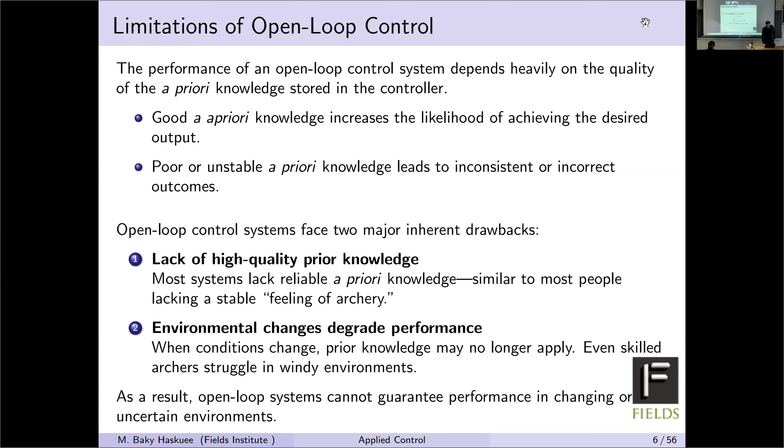We showed the utilities of the closed control system. The first utility was in terms of uncertainty. We showed that open loop control systems are not efficient, so we need to actually have the closed control system.

Because reality has uncertainties, the first utility of feedback control is to show its preference over the open loop control system.

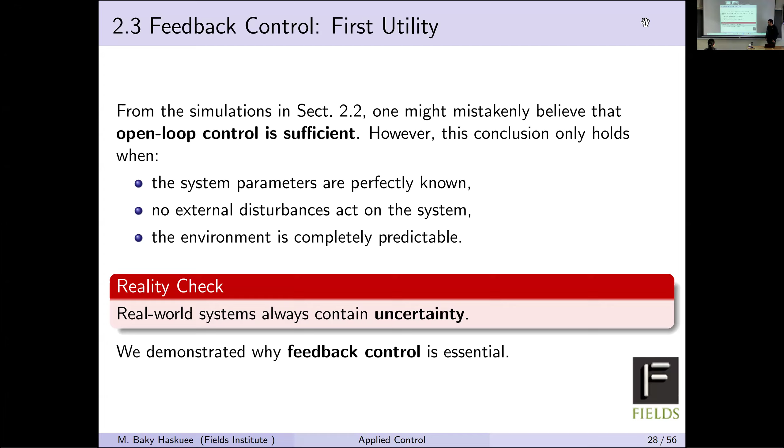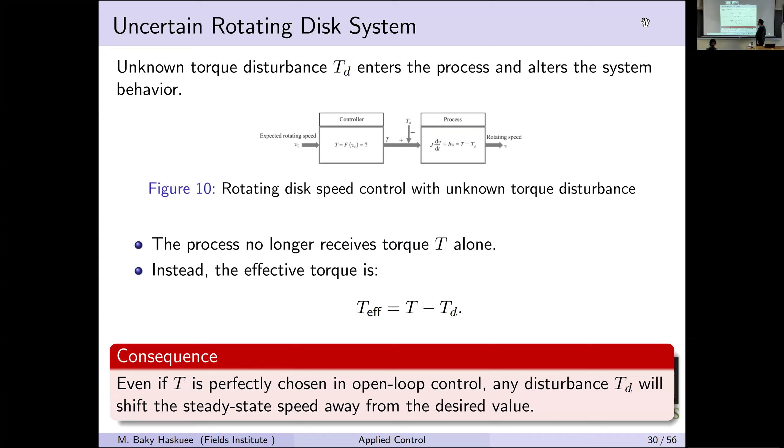We discussed that when we have, for example, external disturbances to the system, here you see that TD is the disturbance to the system. Then we compared, if we have such a disturbance, whether open loop control or closed loop is much better, and we compared the results by simulation.

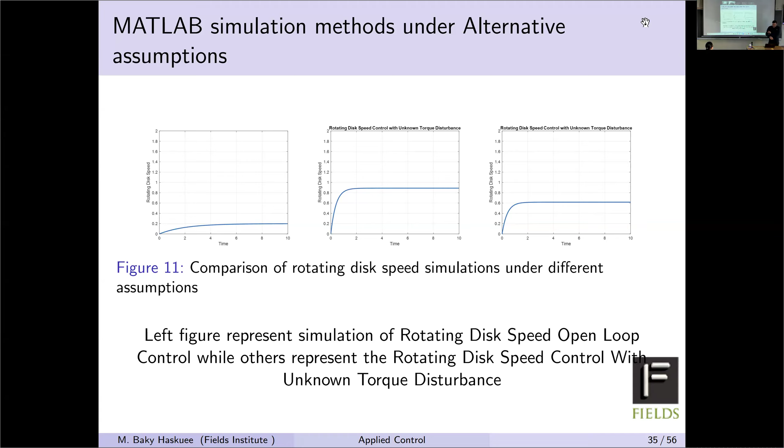So we define two types of control feedback. One was an extreme feedback. The extreme feedback says that if the actual speed of the disk is different from the expected speed, then there is an error.

So the control system will set the torque to the maximum when E is greater than 0, and when E is less than 0, it will set it to minus T max. So these are the two extreme cases.

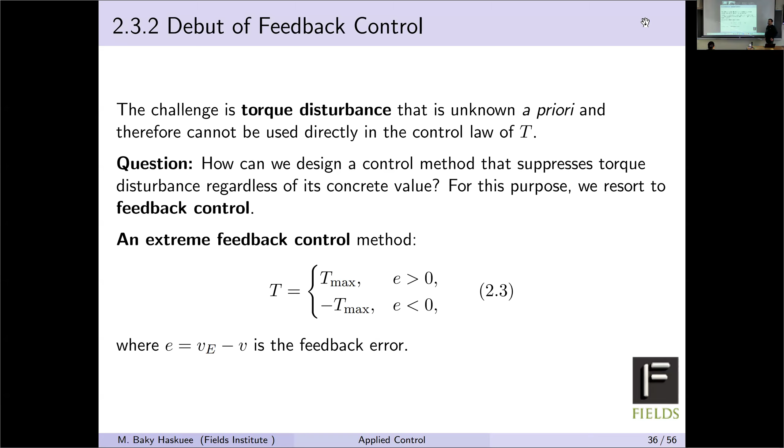In this case, we will see what will happen if we have such a feedback in the control. First of all, we measure the speed by the sensor, and in this system there is no estimator because this is a simplified system, so we just have the sensor. The sensor verifies that the actual speed equals the feedback speed and sends it to the controller.

Because there is a deviation, it means the expected speed is not equal to the actual, or rather the actual is not equal to the expected, which is a better way to say it. Then the controller receives the signals and sends the signals to the actuator.

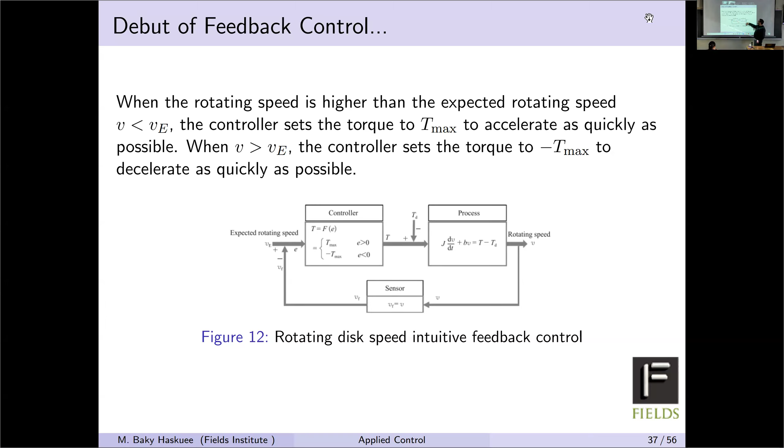So in both cases that we mentioned, if E is greater than 0, it will send the signal and set the torque to T max, and if E is less than 0, it will be set to minus T max. Then it will be sent to the torque, and the process will receive that, and it will be continued.

It means that in the presence of uncertainty, the feedback control actually performs much better than the open loop control system.

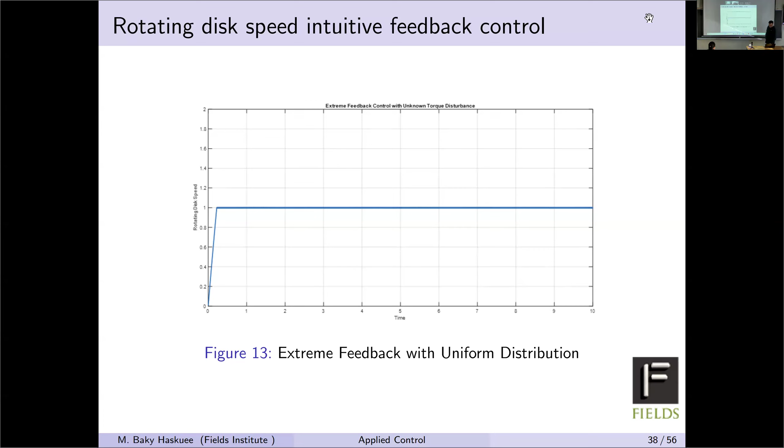But you know that in this extreme case, when E equals 0 and switching occurs, this will be a sharp switching. So we can make a proportional feedback control to switch smoothly between both cases.

In this case, we can set the feedback rule as follows: if E, which is the error or deviation of the speed from the expected speed, is much more than T max over P, where P is a proportional coefficient that we use to proportionally adjust the torque and the signals...

So if it is greater than T max over P, then it will be set to T max. And if it is less than minus T max over P, then the controller sets the torque to minus T max. And if it is in between, then it will be proportional to the disturbance or deviation of the speed.

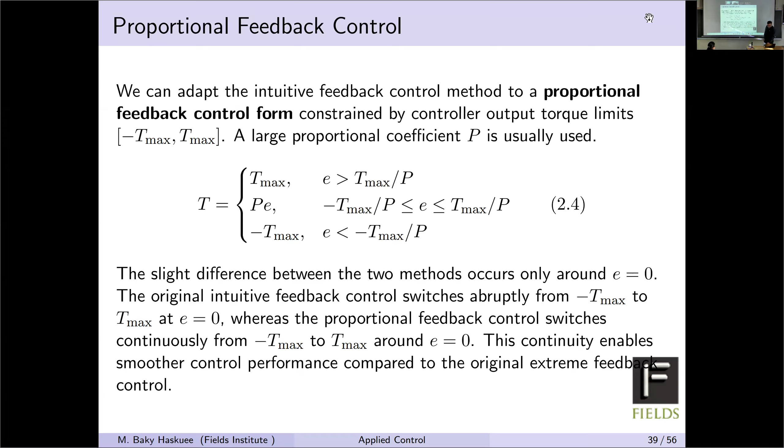So it means that there will be a smooth transition, okay? So in this case, we have the system like this one. We have controller, process, and we have the sensor.

Sensor measures the speed and verifies it as a feedback control, the feedback speed, and sends it to the controller. Then the controller will process this according to the law we mentioned before, so it will be proportional. Then it sends to the actuator, and the actuator will affect the process, and the process speed will be measured again to reach the expected speed.

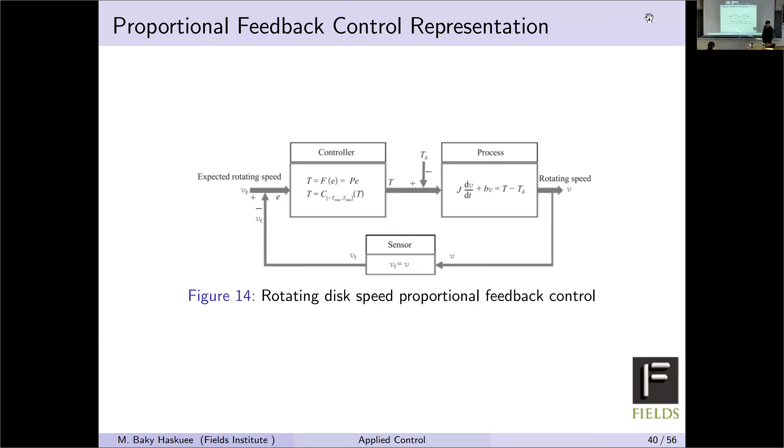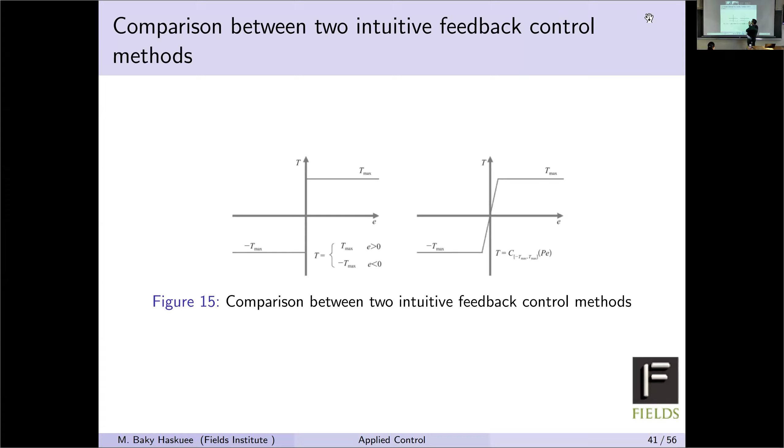So to compare these two cases: in the previous extreme case, if the actual speed difference E is greater than 0, the torque will be set to T max, the maximum torque. And if it is negative, it will be set to minus T max. So this is the extreme case. This one shows the second one, the proportional one. As you see here, around E equal to 0, the transition will be smooth.

So that was the first utility of the feedback control.

The second utility, the question is: if there is no uncertainty, is the feedback control superior to the open loop control or not? Because if there is no uncertainty, we show that in open loop we can reach the expected speed, but it takes time to reach it. So in that case, maybe some people say, when there is no uncertainty in the system, we do not need feedback control, and there is no superiority for feedback control with respect to open loop control.

So the answer is that although there is no uncertainty in the system, the time adjustment, the time to reach the expected speed, is much faster in feedback control with respect to open control. So this is the second utility of feedback control. It means that although we have no uncertainty, we can show that the expected speed will be reached much faster in feedback control.

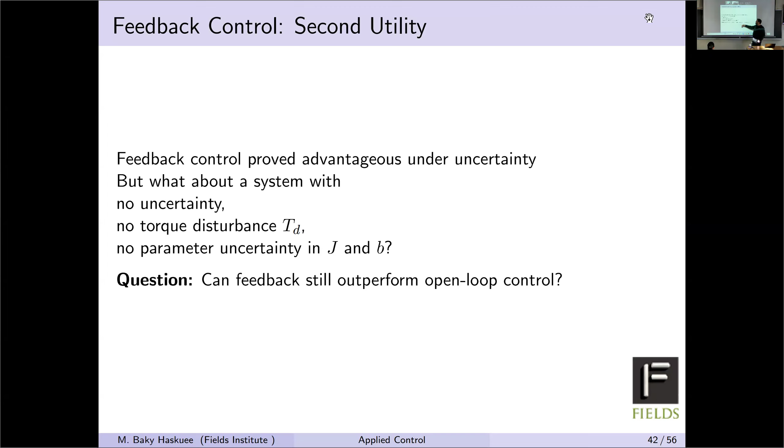So to simulate that, we use the same parameters and assume there are no disturbances here. It means there is no uncertainty and the parameters are fixed as before, the friction and inertia, all of them as before, and there are no uncertain parameters. So we wanted to show whether feedback can still outperform the open loop control system.

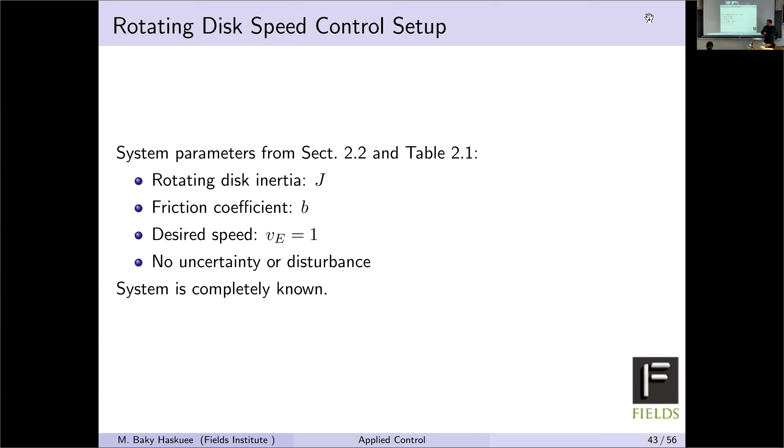So for this, we again set the desired speed to v equal to 1, and the other parameters as before, and simulate the result here. And so this is the result that we got.

As you see, in the open loop control system with no uncertainty, we will reach the expected speed, which was set to 1, but over time it takes time to reach the expected speed. But in the case of the closed loop, we will immediately, or at least faster than the open loop, reach the expected speed.

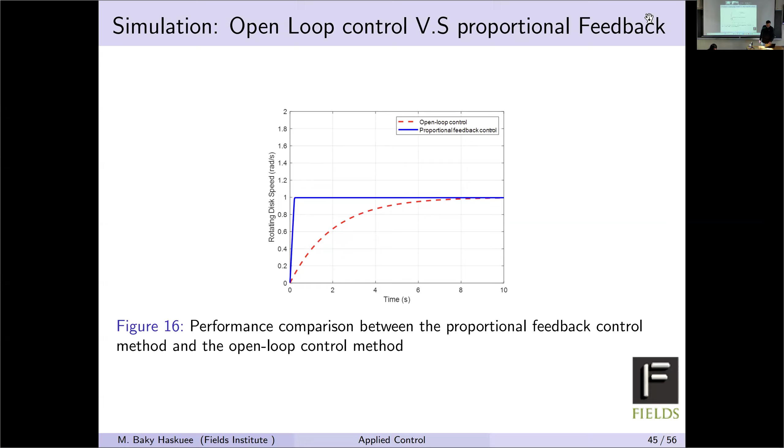So in terms of cost, sometimes time is so important, and when the time to reach the optimal or expected speed is important for the planner, the closed loop outperforms the open loop control system. So this is the result I got from the simulation, and we can simulate for different systems to show the outperformance of the closed loop control system with respect to the open loop when there is no uncertainty in the system. So this is called the second utility.

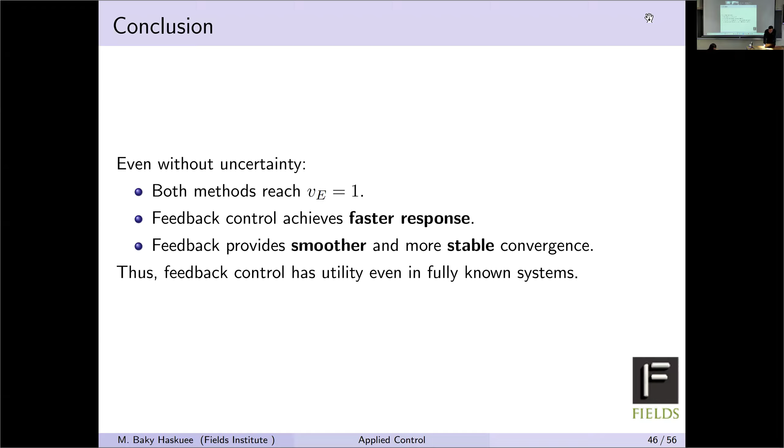So in conclusion, even with no uncertainty, both methods will reach the expected speed, but feedback control achieves a faster response, and it will be smoother or more stable. However, there are some limitations for the feedback control system. We showed that the open loop control system does not perform well when there is uncertainty, and we showed that even with no uncertainty, feedback control outperforms open loop. However, there are some limitations in feedback control, so maybe here I raise the idea that the simulation result may show that.

So the feedback control is a universal solution, but that's not the case. I used proportional feedback control to show the simulation result in the previous example. In the case of rotating disk position control, we will show that the feedback control does not perform perfectly. The result will be unstable and there will be fluctuation.

In the previous case, our target was the speed, and we controlled for the expected speed. But the question is, if we change from speed to position of the disk, does the feedback control perform perfectly or not? This is the question. So we will switch our problem to position control, from speed control to position control.

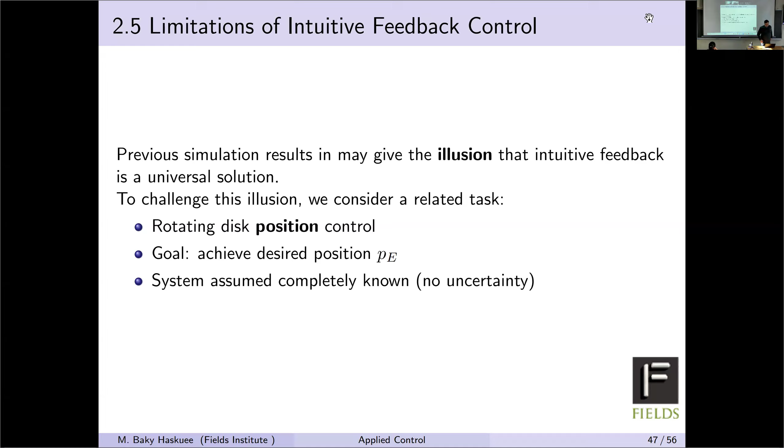The process shows the performance of the disk, the position of the disk. We know that v is the derivative of position with respect to time, so our differential equation will be of second degree, j times the second derivative of p with respect to time, because of the definition of velocity. Our system is the same, except now we want to control over the position of the disk.

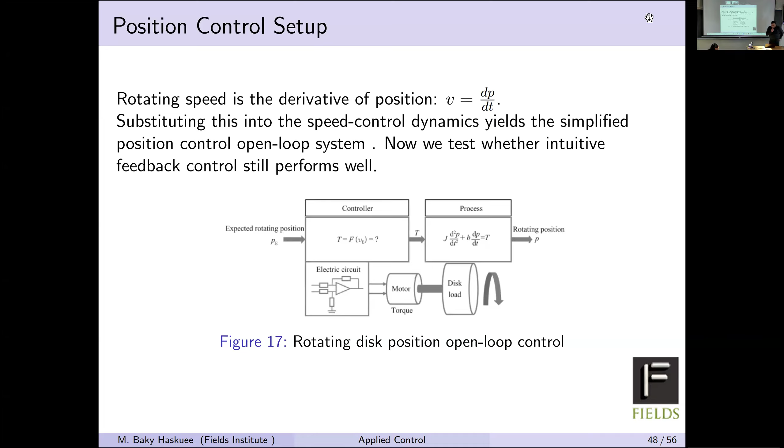So if we simulate and set again our proportional feedback control, this is our rule, as before, it is proportional. Then again we will see that here we have the controller. The controller sets the torque speed according to this rule that we set, and sends it to the actuator, and the actuator affects the process.

The position of the rotating disk will be measured by the sensor, and we assume again there is no estimator, and sensor and estimator are simplified to each other. Then the position PF, the feedback position, will be sent to the controller. Again the controller will send the signals. So this is our system.

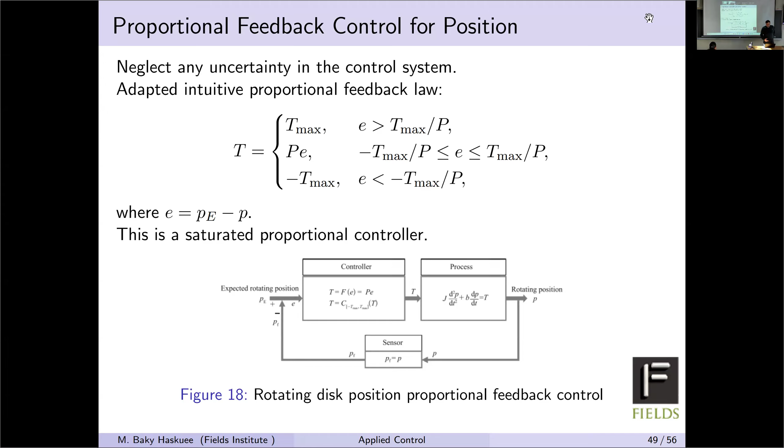But our simulation result, if we set the expected position equal to 1, then although there is no uncertainty and we use proportional feedback, we see that there will be oscillation in the position of the disk. We see that the severe transitional oscillation is undesirable, and highlights the limitation of intuitive control.

Yeah, the oscillation will decrease, but it will not stabilize. At the end, at time t, the position will not converge to 1. It will keep oscillating, although the oscillation amplitude will decrease over time, but the oscillation generally is not desirable, first of all.

So it takes time to have less oscillation. The oscillation will decrease, but even after 10 steps of time, it will not converge to the expected value. This means that if our system is of higher degree, then the feedback control will not be effective when we use the proportional.

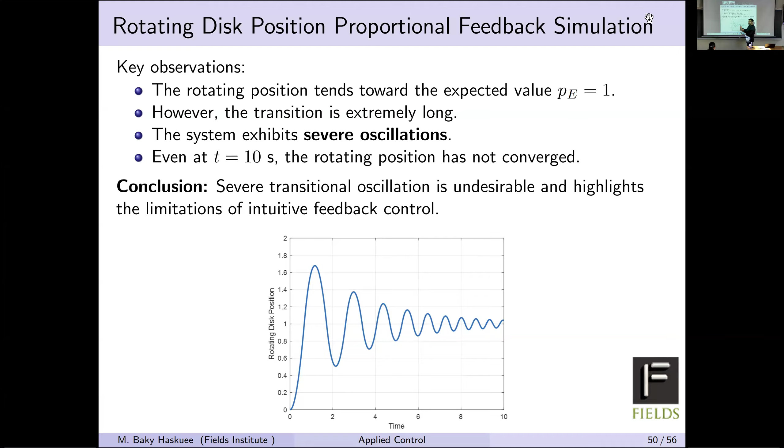So what can we do? We can go further and adjust for this oscillation as well. How? When we had deviation from the expected value, for example the speed, we used proportional feedback to control for that disturbance. In this case, where we control for the position of the disk, we see that it will oscillate, so we should use more derivation to control for the oscillation.

So our solution for this is to use this system here. I will go back to the previous slides. This is the proportional derivative. It is called proportional derivative feedback. This feedback has one component more, an extra addition to the previous proportional control, that controls for those oscillations.

So our rule shows that if we have such a deviation, E actually is the deviation of the position from the expected position, and this will be equal to speed by definition, because when you derive E with respect to t, you get the derivative of position, which is speed. This is constant because it is the expected value, so that will be minus v. So this is our rule.

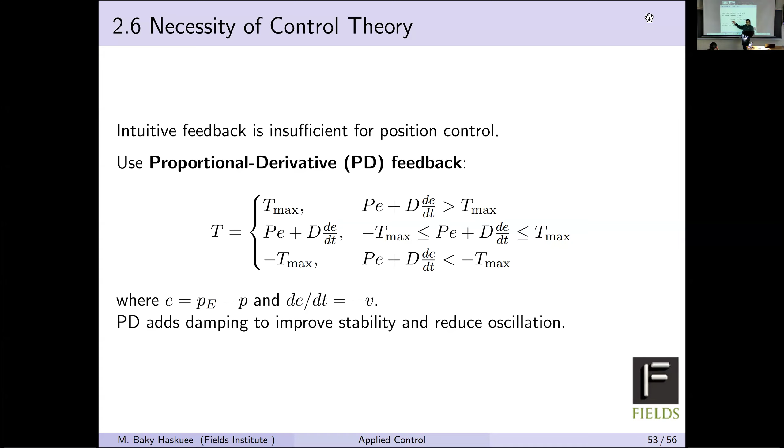The new rule controls for the deviation of the position, so it will control for any oscillation. So then what can we do? In this case, we will see that incorporating this term in our control will control for those oscillations.

So let's go to the result again. This is our system. In this system, we have a derivation gain, which d is the derivation gain. It's a constant term, like the proportional p that we had before. Our system will have a controller, a process, and a sensor. As you see here, the process is the position of the disk, which explains the position. There is no uncertainty in the system.

But here in the controller, the torque is a function of E that incorporates P times E plus d times dE with respect to T. So this derivation controls for the position of the disk, and D is the derivative gain coefficient. So our rule has been enhanced.

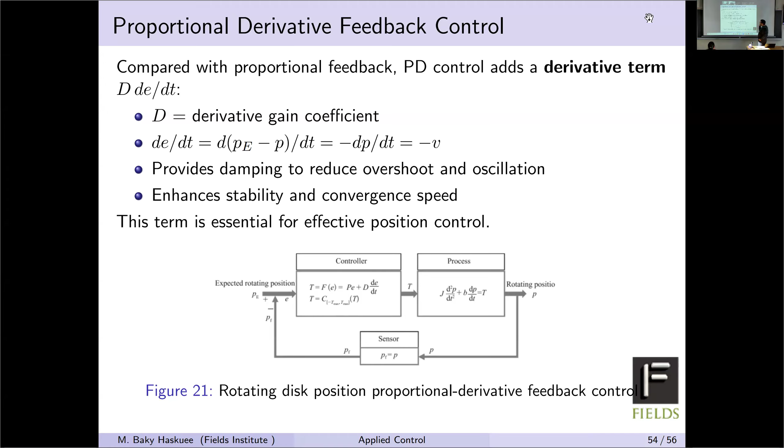So again we will use the same parameters, J and B will be the same parameters, and we will simulate the system to find what will happen. So here we simulated the system for two values. We assume that there is friction, and the results show that if we set the expected position of the disk to 1...

...then if we have the most updated version of the control rule, we will see that the system will stabilize. So then the position will reach the expected position immediately, and it will be steady forever.

Our results show that this proportional derivative feedback outperformed the proportional feedback, because in proportional feedback we had oscillation, but in this proportional derivative feedback there is no oscillation and the system will be stabilized.

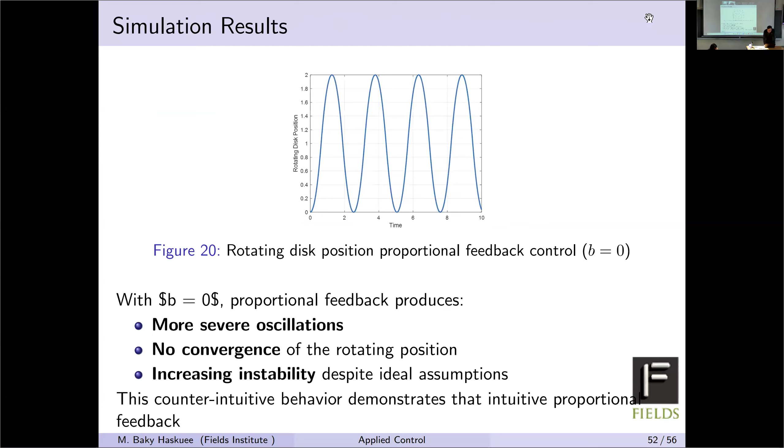Let me get back to this proportional and explain again what was here. Okay, this was, yeah.

So totally we show that the proportional derivative feedback control outperforms the proportional feedback when there is no uncertainty. Our result shows that the feedback control outperforms open loop control system even if there is no uncertainty. And if our system is of higher degree, we should incorporate the derivatives to control for the oscillation in the system, so the control rule should be adjusted with respect to the process. If our process is more complicated, we need more complicated feedback, and the proportional feedback will not be efficient and will not be sufficient as well.